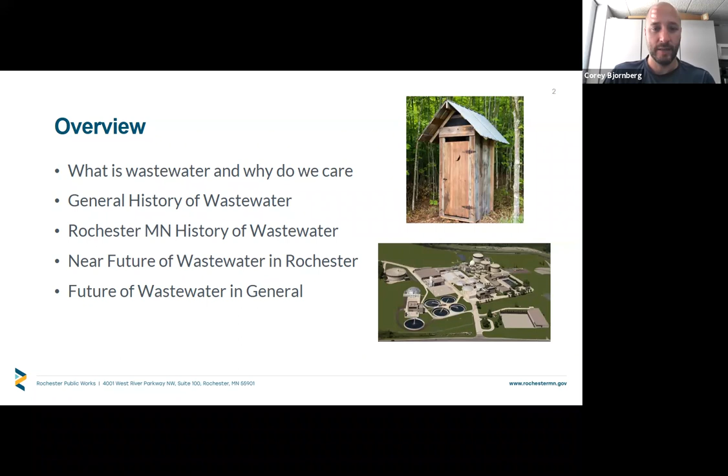And then I'm going to talk a little bit about the future. There's a lot of interesting things going on here in Rochester as well, just with the science in general. I know a lot of people think of wastewater, they think of the famous outhouse up above in this picture. But the reality is you can see the Rochester plant here, picture below, and it's a very advanced facility, as most wastewater plants are now. So there's a lot of science going on, and like I said, it's just a really interesting field.

So what is wastewater and where does it come from? Well, wastewater is water that's been contaminated by us humans. That can include domestic, industrial, commercial. It's amazing. It doesn't take much to pollute water. The water we get coming into the plant is still 99.9% water. We are treating the other 0.1%. Doesn't seem like a lot, but if I showed you a picture of our influent stream, you definitely can tell it's not clean water.

And the way I like to compare it is most cities, most towns, the flow is driven by the amount of people. You can kind of compare that to an interstate. The amount of lanes we need is based on the number of cars we have. However, a lot of places, depending on the city and what industries are in town, the loading, which is the 0.1%, is a lot of times driven by industries.

And going back to my analogy of a road, the thickness of a road is designed for the weight of the heavy vehicles, the semis, the trucks. So we not only have to treat the flow, which is just general population, but the load of pollutants, which can be affected by industries and has been in Rochester.

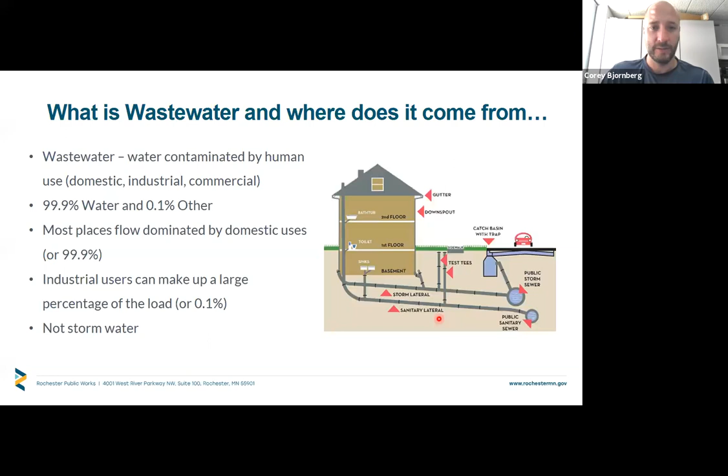the reality is when we get big rains, the flow goes way up. If we have a really high flow, our plant needs to handle that. Essentially you need to build a larger plant if you're going to treat the stormwater, so we like to separate those out. So there are differences. And I always like to plug, if anyone's out there, sump pumps should discharge not to a sanitary sewer. It should go to a storm sewer.

So again, why do we care about wastewater? I think many of us kind of have the mentality out of sight, out of mind. We flush it down the drain and it is gone. We don't have to worry about it. But the reality is that's not the case all over the world. Here's a few pictures from different countries where they don't have the treatment. They simply discharge it out into the community at different points. In 2010, the UN recognized safe and clean drinking water as a human right.

Poor sanitation is linked to diseases, and it's unfortunate this still occurs because with wastewater plants, we can take care of this. Some of the diseases that are common with wastewater transmission are cholera, diarrhea, dysentery, hepatitis, typhoid, and a few others. And 2 billion people still don't have this basic sanitation, and estimates are around 800,000 people die because of inadequate sanitation. And finally, they say, poor sanitation reduces well-being, social and economic development.

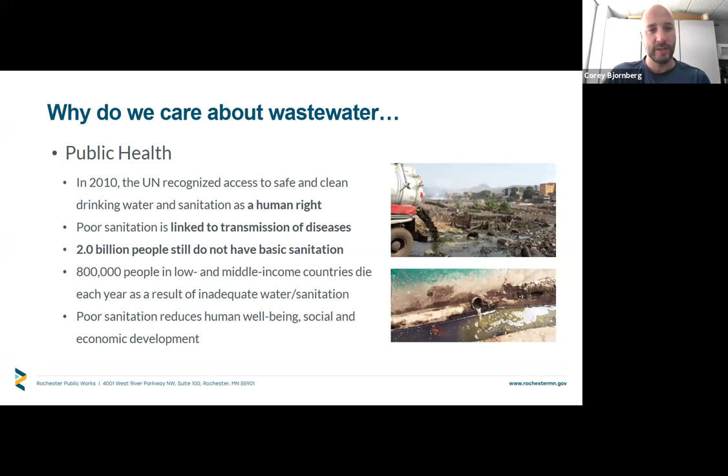And with these pictures, you can easily see that no one wants to be eating at a restaurant if this is going on next door. So the primary driver for wastewater treatment is public health. There are secondary factors, primarily the environment. Discharge of wastewater and pollution from that source can have all kinds of negative impacts on the environment. Organics can deplete the oxygen and result in fish kills. Different materials can wipe out benthic microorganisms, which are the basis of your food chain in your rivers and lakes.

And one of the issues that is still somewhat common today is excess nutrients. They can come from a variety of sources, one is wastewater treatment, but they create algae blooms. I think most of us have probably been to a lake or a river with algae, and no one enjoys being covered in algae. So we also have to consider other beneficial uses: industrial consumption, livestock irrigation, crop irrigation. If we pollute our rivers and lakes to a certain degree, they can no longer be used for those uses. So we always are looking to protect those uses as well.

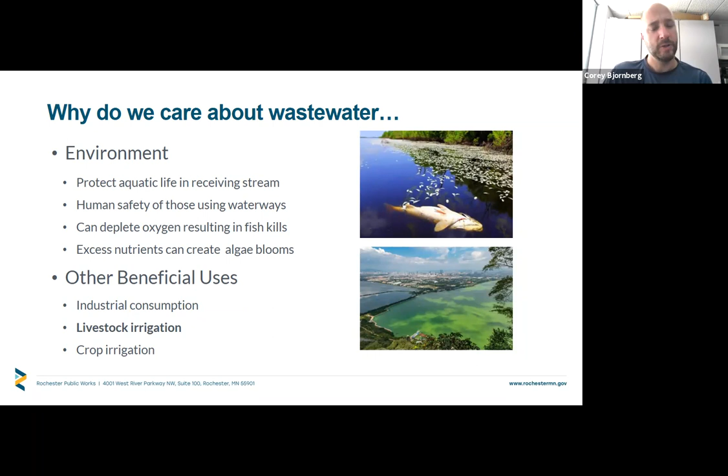I thought this was an interesting quote from Les Mis: "The history of men is reflected in the history of sewers." So an interesting connection to a pretty popular story there.

I'm going to go back and just talk a little more about the long-term history, and you can break it up into 5 main periods. We'll call it early history, the Roman period, the sanitary dark age, the age of sanitary enlightenment, and then the age of stringent environmental standards.

So one of the things as you look back, human waste has always been a point of conflict to a certain degree. How do we deal with it? Who should pay for it? Who gets it? And it's not a new problem. It's a problem that's been going on for a long time, and it's going to be a problem going forward as well. But it is interesting as I go through the Rochester's history, how people's views and opinions about wastewater have changed.

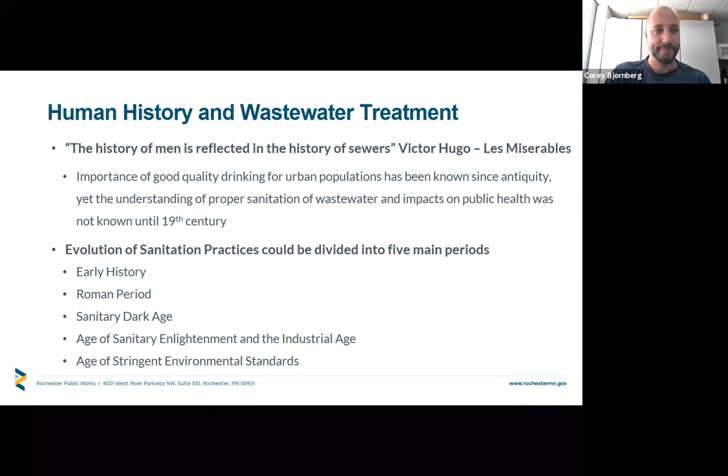So let's talk about early history, 3,500 BC to 800 BC. The hunter-gatherers, it really wasn't too big of an issue because they moved. So when they would relieve themselves, you didn't have too much of a problem because you spread out the waste. It's not till people started really living together and staying in a single location that this really started to become a problem.

Treatment of wastewater was really a recent development. For the longest time, people didn't understand exactly why, but they knew that wastewater caused issues in terms of health. Obviously, we just have a natural ability to look at water, and no one wants to drink water that doesn't look clean. So there's some natural abilities that we have, and people quickly realized that if we're going to live together, we need to move this out of our living space.

So the Mesopotamian Empire, they were one of the first. Their ruins show that homes were connected to a drainage system, and the latrines would lead to a cesspit. This was only really for certain homes. It seemed like the more wealthy homes had this, while a lot of poor people really just threw their excrement onto the streets, which would be tracked around and carry diseases.

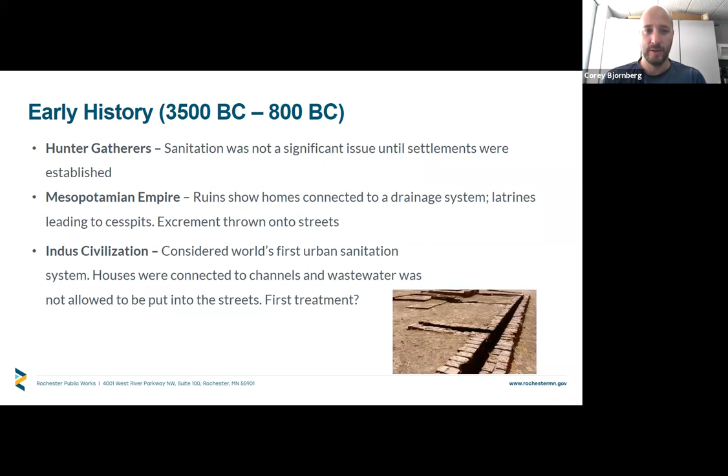The Indus civilization, they were the world's first urban sanitation system. They were one of the few that actually did a little bit of treatment. Essentially, they had terracotta pipes, and it would gravity flow into a small pit and let the solids settle out, and the overflow would go back out into a channel. So it's a pretty crude treatment, but pretty impressive for the time that they actually were removing some solids versus just conveying the wastewater.

It was interesting. I thought that they would be buried, or at least some folks would be buried with their toilet seat. I'm assuming that the kids maybe didn't want their parents' toilet seat passed down through the generations.

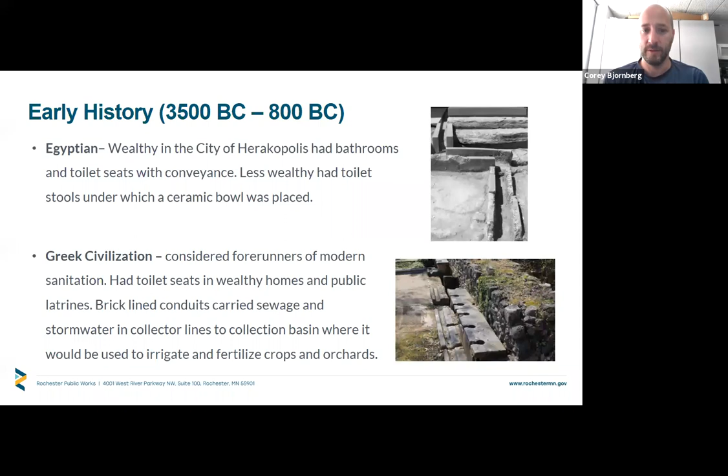So the Greeks were kind of the modern forerunners of sanitation. Again, the wealthy had toilet seats in their homes. A lot of times they were made of limestone, but they also were the first to do public latrines. You can see an image here of what they would have looked like. And again, they would essentially have some rough half pipe, and it would flow down and away from your populated areas. The Greeks also did build cesspits and were actually using the waste to irrigate and fertilize crops. So they were one of the first to reuse some of the waste for different purposes.

And then the Romans, they reached a different level of engineering. Everyone kind of knows about the spas and their aqueducts, which were bringing water in. But what people don't know is the extensive networks of sewers that they also put in. And they also were aware of different water quality. So they knew that the spring water was better for drinking, and surface water from a river or a lake was better for using in the spas or flushing latrines. They also recycled their water. So the water from the spas would actually be used in the latrine. So they really reached another threshold compared to anyone else.

One of the interesting things about them was almost every major city put in an extensive sewer system and stormwater system. The rich had their own bath houses, but the poor had public spaces. But one of the things the Romans discovered was, again, in the early years, if they didn't convey wastewater for even the lowest class, it resulted in epidemics breaking out. So Rome made sure that even their lowest, poorest citizens had access to sanitation in this manner.

So they also built some incredible structures for this. The Cloaca Maxima was essentially a sewer out of Rome. Originally, it was used to drain a marsh that they wanted to build on, but later it was converted to a sanitary sewer, and it went out to the river Tiber, where it was discharged. So again, not treatment, but conveyance, getting it away from the citizens, getting it away from the populated area.

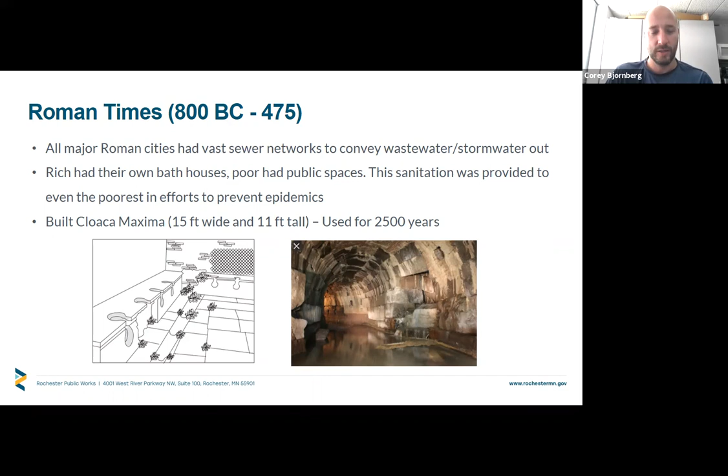And they viewed it as, again, just keeping your population healthy also made it productive. The Cloaca Maxima is actually still in existence today, and I believe parts of it are still used for sewage conveyance. After the fall of Rome, things really took a step back.

These are some different images from the mid-centuries there, and it was pretty common simply to discharge your waste out into the streets or relieve yourself in buildings. So you can see a few of the images there. And if you had a castle, you kind of built a vertical pipe for it to fall down. Some places did have a few sewers and there were some cesspits, but ultimately this led to, again, a lot of epidemics, a lot of health issues.

And actually it became so polluted at times in different countries that water was considered unhealthy, resulting in a lack of hygiene. When I was getting ready for this presentation, I learned that the wigs that were used in certain countries were to cover up the dirty hair because they didn't want to use the water. They knew, again, humans always kind of have this innate knowing not to drink contaminated water. But it's interesting, some of the social changes, because they were so fearful of the unhealthy water.

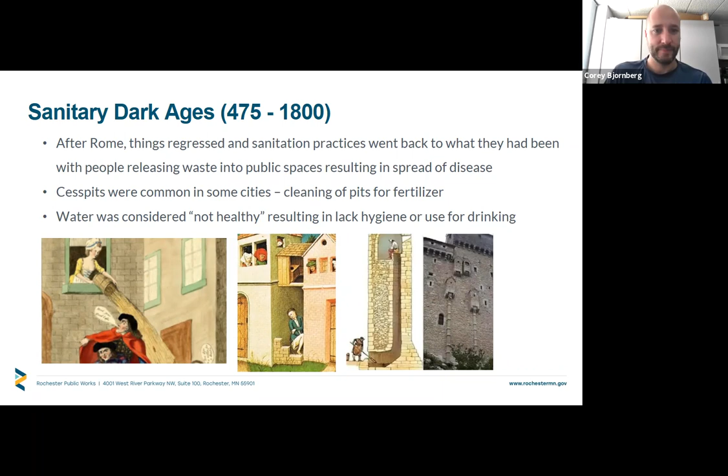So then we get to the Industrial Revolution, and this is really when things start to turn. So essentially, the high increase in population and density caused the need for sanitation. Again, at this point, people kind of knew that they needed to convey the wastewater. They needed to get it away from the people. And generally that meant discharging it to your nearest river.

So in Britain, they built a very large sewer and discharged to the Thames River, but it became overpolluted very quickly and resulted in what they called the Great Stench. So the river must have been just terrible. But by the late 1800s, people started to look at, okay, we can't simply dilute this in the rivers. There's too many people. It's causing issues. We have to do something about it. So they started working on different technology.

One of the things I mentioned here is BOD, which is biochemical oxygen demand. A test we still use today, but one of the first tests to measure how polluted wastewater is. Essentially, it's a measure of organics and how much oxygen it takes to degrade those organics. And so they could start measuring how polluted things were. World Wars, both 1 and 2, really slowed the progress down. At that point, wastewater treatment technology kind of just really stopped.

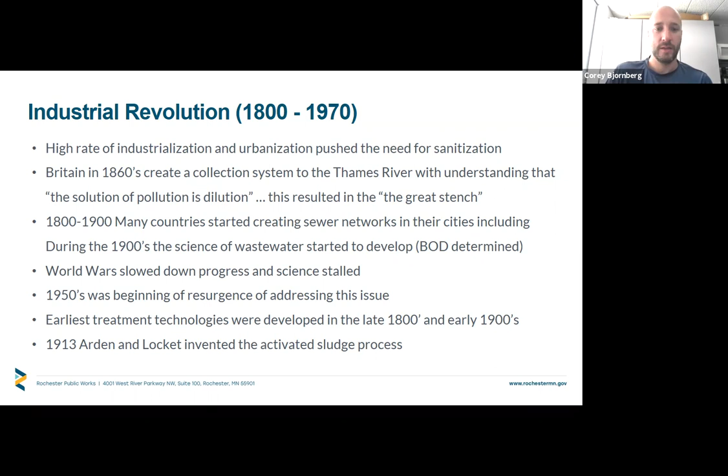And then finally, the stringent environmental standard period, which really just started in 1972 with the Clean Water Act. So, we're only talking 50 years of really stringent effluent standards. A lot of growth in the science fields really helped progress this, understanding both rivers, lakes, but also how to treat plants.

This picture here, essentially, we have an Imhoff tank. It's an older technology, but it is still used. But here's the one I want to point out. This is an activated sludge process, the basic concept. Essentially, your wastewater is going to come in. It's going to go into this aeration tank. We're going to add oxygen or air into this tank.

And then we're going to use microorganisms, or I'm going to just refer to them as bugs. And these bugs are not anything special. If you dug in your soil in your backyard, you'd find a similar set of microorganisms. But under that environment, they are going to degrade and reduce pollutants. Once they've reduced the pollutants, they actually come to a settling tank. The nice thing about these bugs is they settle, they sink. So they settle to the bottom and our clean effluent comes off the top.

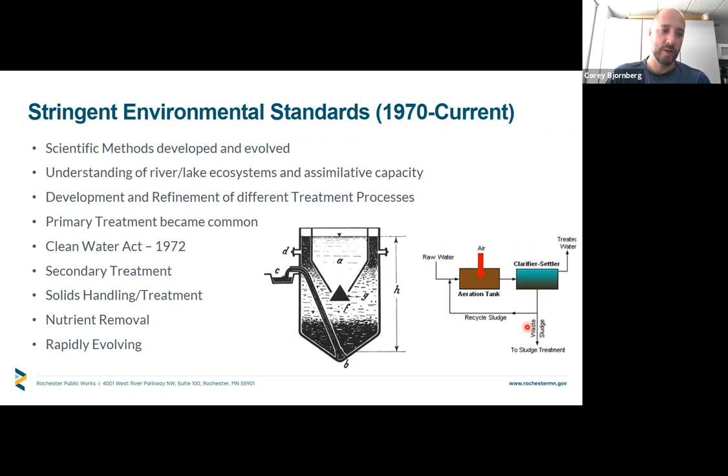And then what we actually do is recycle them back around to go again. So they just constantly go in a loop here. We do have to waste a certain percentage of them. They would overtake our tanks eventually. So there's a wastage portion to this. And we'll talk a little bit about what that means because we have to do something with that waste as well.

So that's a very brief history of wastewater in general, but now we'll talk about the Rochester plant specifically. So as with most places up until kind of the late 1800s, early 1900s, again, we're conveying our wastewater. Let's get it away from people, which meant we're either discharging into a river, a lake, or in some cases an open field.

What happened in Rochester specifically was in 1916, farmers of Cascade Township began to complain about the river conditions. The river was polluted with the wastewater. Their cows, chickens, pigs were dying from drinking the water. They even threatened a lawsuit to the city for being robbed of the natural use of the river. You know, 1916, this is a couple of years after the invention of activated sludge, just keep that in mind.

In 1924, the city created a charter that allowed for a sewer plant. One of the things that I'll talk about is the names of wastewater treatment plants have changed over the years. It was pretty common initially to be sewer plants. Now there's varying names. We're currently the water reclamation plant. We're reclaiming water to release to the environment.

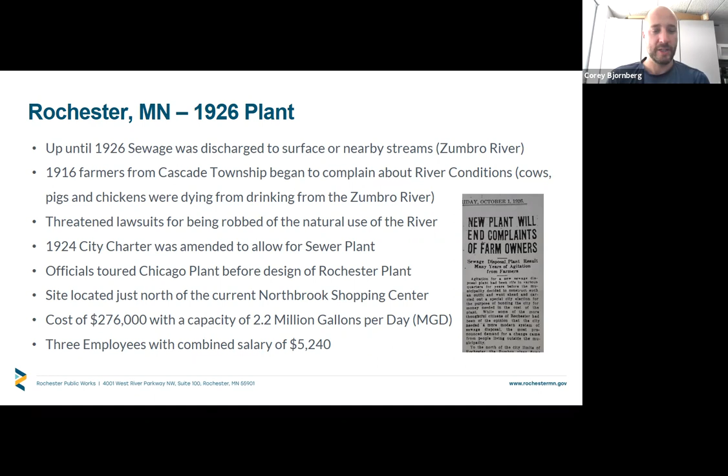Prior to building that, again, this was a very new science. A lot was not known. So officials from Rochester toured the Chicago plant before designing the Rochester plant. And the site is actually on a different site than we're currently located. It's located just north of the current Northbrook Shopping Center. It cost about $276,000 and had a capacity of 2.2 million gallons per day, which is a pretty big plant at that time. They had 3 employees with a combined salary of just over $5,000.

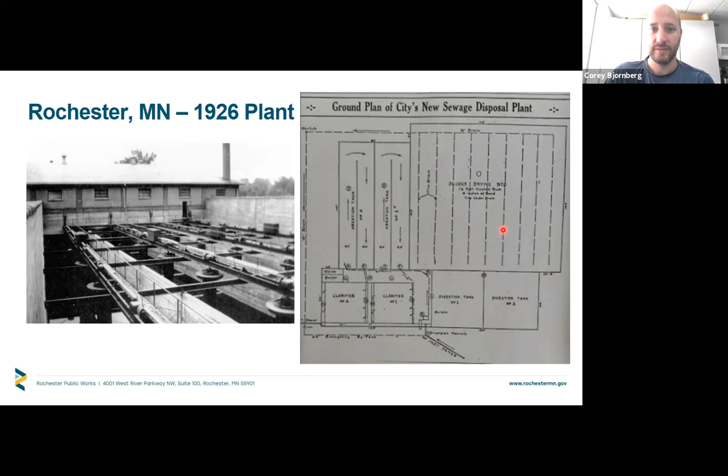So, one of the things you're going to hear me say over and over again is rapid growth. Rochester has grown relatively fast compared to most Minnesota cities. And because of that, the plant was overloaded fairly quickly. Industries also played a part in that. I'll talk a little bit more about that.

But essentially by the late 1930s, that plant was overloaded. It was designed for 2.2 MGD, but by that time they were handling about 2.8. So it was already over capacity. They were planning on expanding in the late 30s, but then World War II struck. And so it dropped off. And it wasn't until the 1950s that the discussion picked up again.

So from the 1930s to about the 1950s, that plant was simply overloaded, which means it did some treatment, but not treatment to the degree that we would want. By the 1950s, again, because it was overloaded and the fact that they used some of the drying bed technology, they decided to move the plant. They moved it 2 miles out of town to our current location right off 37th Street. And that was largely driven by the odors and complaints around the odors.

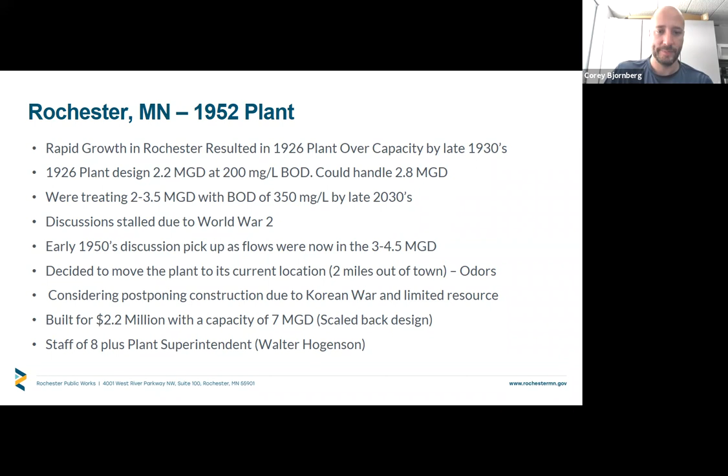They built it for just over 2 million with a capacity of 7 million gallons per day. But again, it was scaled back from that initial design. It was staffed by eight employees. This is what the plant looked like. If you drove by today, you can still see where the water tower was located, and this building still exists. And actually, most of these buildings still exist out here, and some are still used to this day.

The primary technology, I've talked about activated sludge, where we create a mixture of microorganisms in a free floating suspension, and we aerate them. This used a trickling filter design. Essentially, these tanks are filled with rocks, and you sprinkle the wastewater over the rocks, and you get the same sort of microorganisms that grow on the rocks, and they do the treatment. So you don't have to provide energy in terms of mechanical means to get air, because the air is there as it trickles down through these rocks.

You can see in the original design, it was going to be a 2-stage process. They only built 1 stage, and the performance was a little less than they expected, but they also eliminated the 2nd stage, which dropped performance. They also were planning on 4 digesters, and when I say digesters, anaerobic digestion is a popular treatment technology. The bugs were wasted from these different processes. Originally, they just put them on drying beds. We learned that we need to digest them.

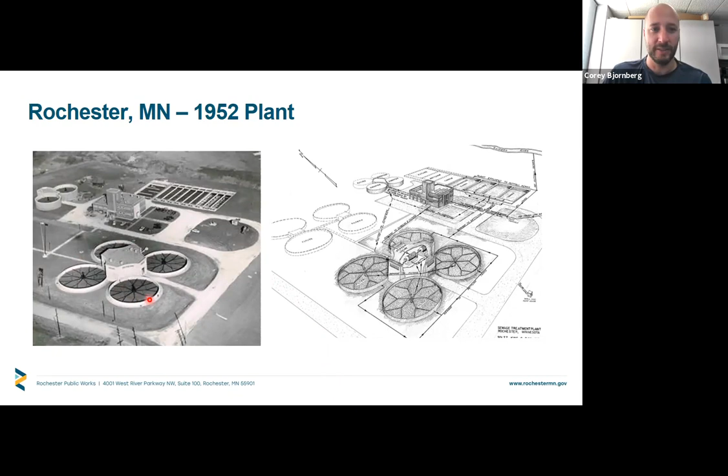So I should say the trickling filters we moved on from, but we kept some of the rock on site. So if you ever do a site visit, I can show you. We do still have the rock. We used it to stabilize some of our hills out here. So we reused that rock from the 52 plant.

A few pictures here of that plant. So here's the trickling filter. You can see the arms coming out. That is where the wastewater would spray out and then over the rocks. This is the main admin building at that time.

One of the things, usually civil engineers were the designers for wastewater treatment plants. Initially, they were really good at designing buildings. So when you see older treatment plants, they usually have these older, beautiful buildings because that's what they knew how to design and how to design well. And then when it came to the processes, not so much. It was still much of a learning curve.

So they did have a vacuum filtration system. So one of the things we do is when we generate these solids in the form of these different microorganisms, they're usually mixed in with liquid. We try and dewater them. It's simply a way to reduce the volume, which reduces conveyance cost of disposal. So think of it as hauling one bucket out to the dump versus 10 buckets. It just makes it more efficient. So they used a vacuum filter technology, which was really innovative at the time. But I don't think it worked all that well.

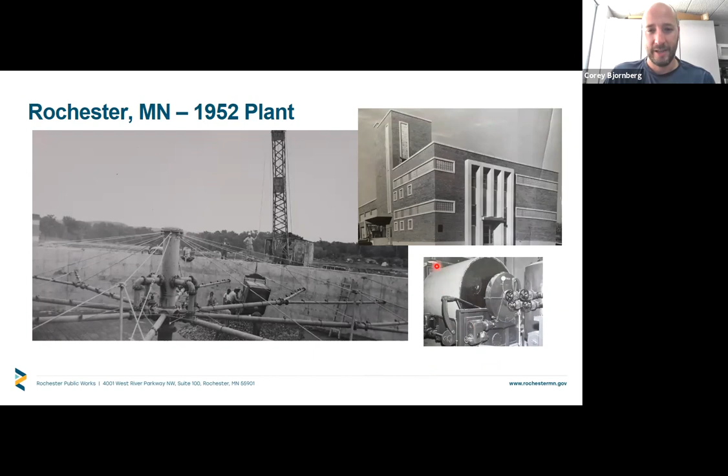So again, continued rapid growth in Rochester, and the industries. Rochester historically has had several dairies. Nowadays we have pre-treatment requirements. They have to reduce a certain amount of their loading. At this time they didn't, so they would just discharge everything. So there could be huge, massive amounts of dairy waste that would come to the plant, and it quickly overloaded the plant, especially on the solids handling side, which means the digesters that I talked about were digesting the waste bugs.

So again, one of the trends you'll see in Rochester's history and in a lot of places is the original plans were scaled back due to cost, and then they find out that they essentially had to do those additions later on. So in the 52 plant, they decided not to build two of the digesters, well, 6 years later, they ended up building those digesters and even building them larger than they originally had planned. And those were about 270,000. And here you can see a picture of what's inside an anaerobic digester.

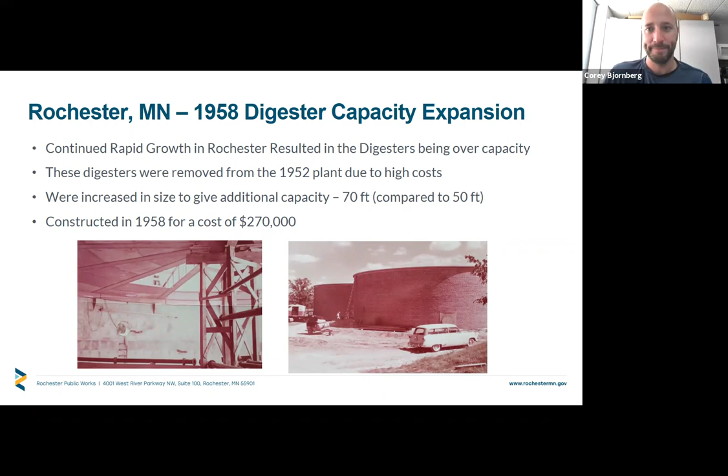So now we got to the 69 plant. Again, primary driver for this was rapid growth. They picked a different technology here, and I couldn't find in my records exactly why. They actually went back to kind of an activated sludge in combination with a trickling filter. I'm not sure if it was for cost, or more likely it was due to odors. Trickling filters can be odorous, and there are reports that the odors from the plant were an issue. So it might have been that reason, but I don't really have a firm answer on that.

One of the big issues with this plant was while they were building it, and this is a problem we still face, while you're doing an upgrade and expanding a plant, you still have to maintain treatment. We can't tell everyone, hey, for the next 2 years, you can't use your drains. And so one of the upgrades was going to be to the raw pumps. Well, what they planned to do while they upgraded the raw pumps was simply discharge wastewater into the river untreated for about three weeks. And the public got wind of this, and there was a big uproar.

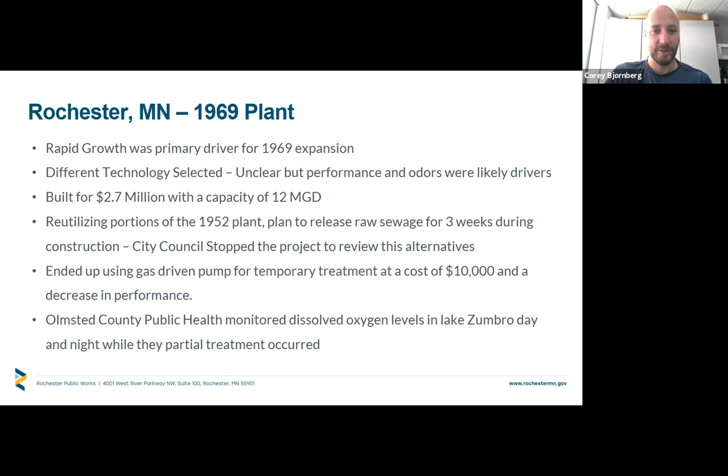Essentially, this is the plant. The modifications: they changed the pump station. They built the activated sludge plant again. So we're now back to the technology of the '26 plant. But they did add primary clarifiers.

So a primary clarifier is essentially a big tank. Think of it as a small lake, and you settle out your solids and you pump them to your digester. Why you do this is it essentially reduces the load on the bugs that need to be aerated. So it's an efficiency thing. You can reduce your aeration requirements, which can save you money.

So essentially the flow came in, went through some primary clarifiers here, then the activated sludge plant, and then final clarifiers. And then I should say intermediate clarifiers, because then it would actually go to the trickling filter. So you had a 2-stage system, one level of treatment here, one level of treatment here, and then you go to your final clarifiers, chlorinated and out.

They did have a sludge lagoon at this point. One of the things with the sludge, or the waste bugs that have been treated safely, no one really knew what to do with it for a long time. So one of the options was to build lagoons and simply store it there. They also put in drying beds again. Again, I think like the '26 plant, we went back both to an activated sludge and drying beds. Guess what? It created odors again. So we got more odor complaints.

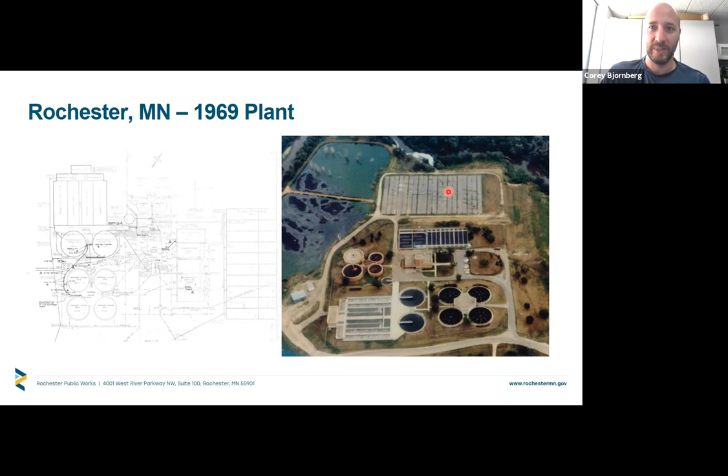Some pictures of this plant. Just kind of go through these quick. This is at night. One of the questions Abby asked early on, is it manned 24/7? The answer is almost always yes for Rochester. It depends on the technology for other cities.

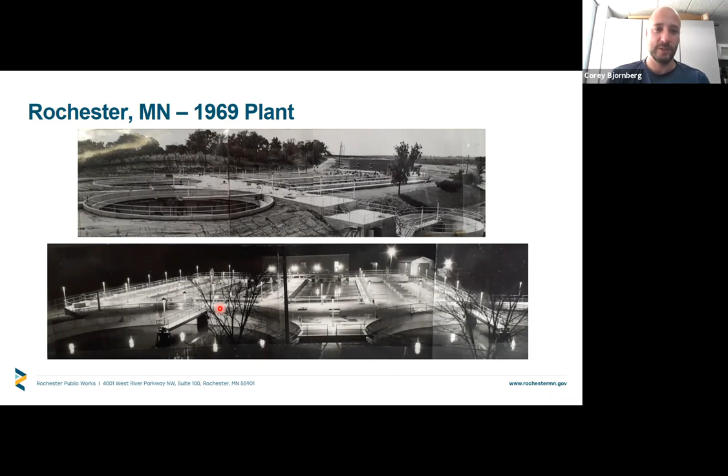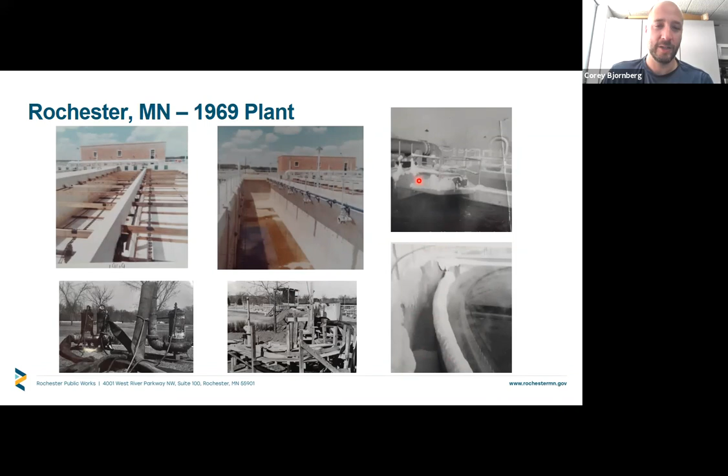Just some more pictures. These are the clarifiers. This was the activated sludge tank. This was the temporary pumping they did so that they didn't have to release raw wastewater into the river. One of the things they found, obviously we live in Minnesota, snow and ice becomes an issue. You get lots of buildup of frost, which can create havoc on your system.

All right, so now the 1980 plant. So essentially 1 year after the '69 plant, the Pollution Control Agency approached Rochester about tighter limits. So generally speaking, we've talked about expansion because of increased loadings and rapid growth within Rochester. Now this upgrade was really driven, at least in part, by tighter limits. So they were pushing for some pretty stringent limits.

And one of the interesting things at this point, before they built the '80 plant, they gave a strong consideration,

sorry about that, the intercom is going off.

But they gave a strong consideration for actually moving the plant, moving it to near Oronoco or in Oronoco Township. They also considered a sewer district. They considered combining with Dodge Center, Kasson, Mantorville, Byron, Pine Island, Oronoco.

Should stop here shortly, sorry about that. But ultimately, the increased costs for moving the plant and... there we go. Again, I apologize for that.

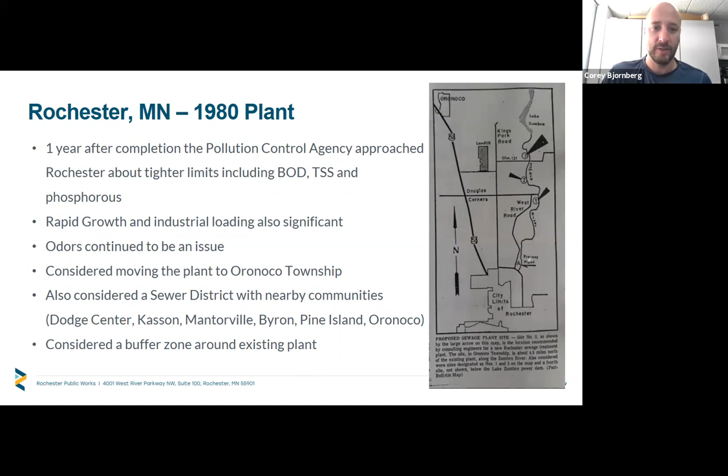Then, as they were working on this plant, we had the '78 flood. Most folks who have lived in Rochester are aware of this flood. It did submerge a portion of the Rochester plant, and treatment had essentially stopped for a period of time because a lot of it, especially the raw pump station, became flooded.

So during this time, to get around the plant, one of the operators brought in a boat, his own personal boat, and that's literally how they got around to the different processes to try and get the plant up and going. They even had an interview on a boat for a new operator at that time.

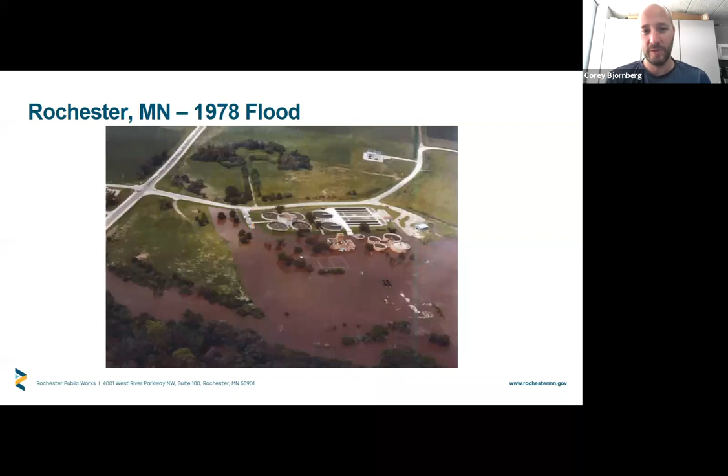So then we get to the 1980 plant. Again, this was largely for lower limits, but it just so happened that there was a bunch of federal money available at this time, especially if you were choosing innovative technologies. So we used an HPO design, which is high purity oxygen. Essentially, that means that instead of normal air and feeding the bugs, we're feeding them high purity oxygen. It's the same thing if you go to a hospital, they give you high purity oxygen to help you breathe better. It's a more efficient process, one that we're still using today.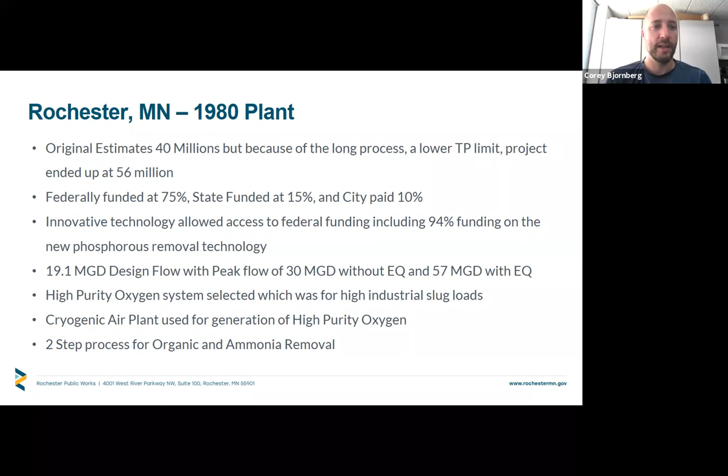The city only paid 10% of the project cost, and the total cost was around 56 million for this project. So the city only paid 10% of that. And the capacity was increased to about 19 MGD.

And I'm actually going to let Wendy here, Wendy Turry, who's the Public Works Director, talk. She worked at the plant about this time and actually worked on this process. So I'll let her talk a little bit about it.

Hey everybody, thanks for having us here. It's fun to talk about wastewater. I came out of college in '82 with a chemistry degree and was going to be a mad scientist, and ended up getting offered a job here, and I've been working in wastewater for 39 years. So I got the bug.

So a couple things that you'll see: odors drove the design of this plant, and innovation, partially because the plant superintendent at the time really liked to be creative and look ahead, and also the funding. You could get really good funding, and we had to treat for phosphorus. Not many people had to treat for phosphorus, and nobody in the state was using this kind of treatment, and this was really using bugs to treat for phosphorus. Instead, they were using chemicals, and chemicals were expensive, and you had to bring them in. If you can use bugs, it's much cheaper and better for the environment.

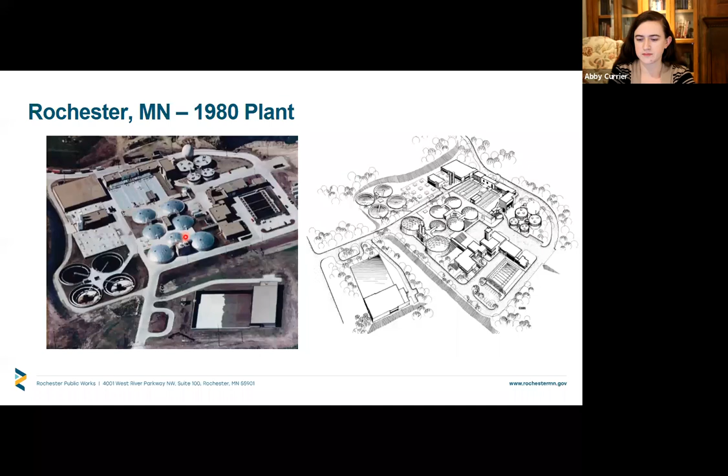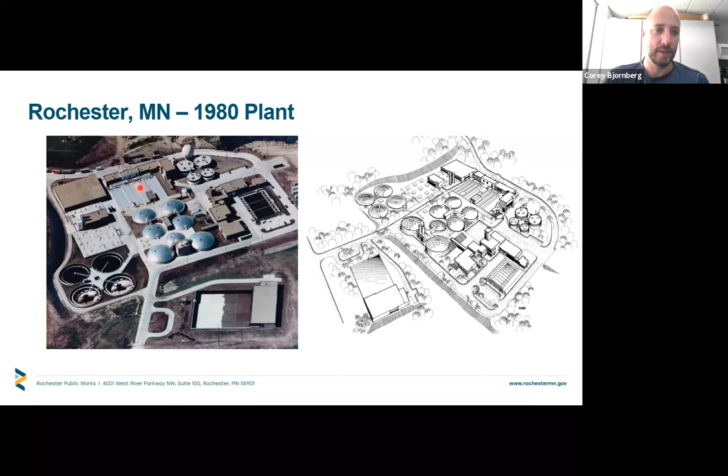So Wendy talked a little bit about the Phostrip process, which were these tanks here. But essentially, this was the new plant here: these tankage here, and this tank here. And this plant, which was the 69 plant, was actually abandoned at that point. Later it was retrofitted for some other uses, but at that point, they really moved on to this technology here. So a few pictures of construction. You can see it was quite a big project to build that.

I'm going to talk a little bit about a cryogenic air plant. That's how we make high purity oxygen. If you're familiar with Highway 52 and the oil refinery, just north of the oil refinery on 52, they also have a cryogenic air plant. So it's this tall structure. Essentially, it's a distillation column. I'll talk a little bit more about that in a second.

These were the raw pumps. So now we're starting to get into some serious size. All these pumps could pump about 50 million gallons per day. You always size your plants to make sure that you can pump all the wastewater. I say, our number one job is to treat wastewater, but our number one job is to pump wastewater, because we don't want to back up into people's homes and expose them to raw sewage.

Also, it's kind of hard to see in this picture, but this is our sphere. One of the things with anaerobic digestion, where we talked about digesting the bugs to make them safer, that process actually releases methane. And one of the innovative things about this plant was we decided that we will collect that methane. We can store it in this spherical structure, which we still use today. And then we can feed it into boilers or generators to either produce our own heat or our own electricity. So that's something we still do today.

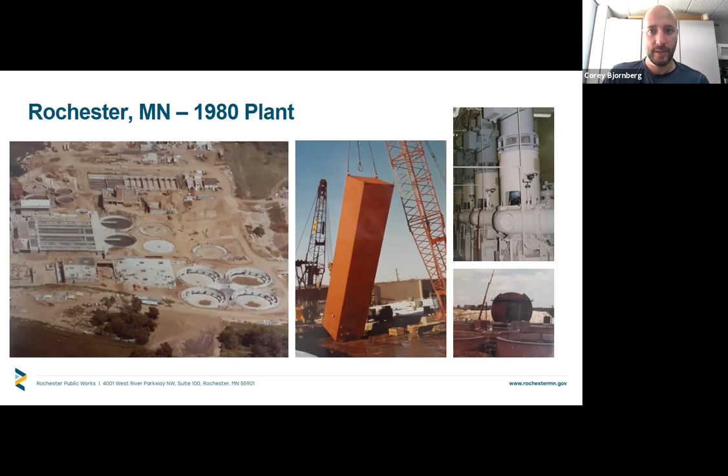Some more pictures of the construction here. One of the things that the 80s plant also did was start bringing in automation. Up to this point, most of the changes that would happen in a plant involved an operator walking to a valve or a piece of equipment and doing something. Here, they actually started automating it, which Rochester, again, was one of the first plants in the Midwest to do. It took a lot of work to automate it. It worked okay. It's come a long ways, I think. Nowadays, it only takes one person to operate the plant, and most of what they're doing is sitting at a computer like this, monitoring all the different processes. A lot of it is simply automated.

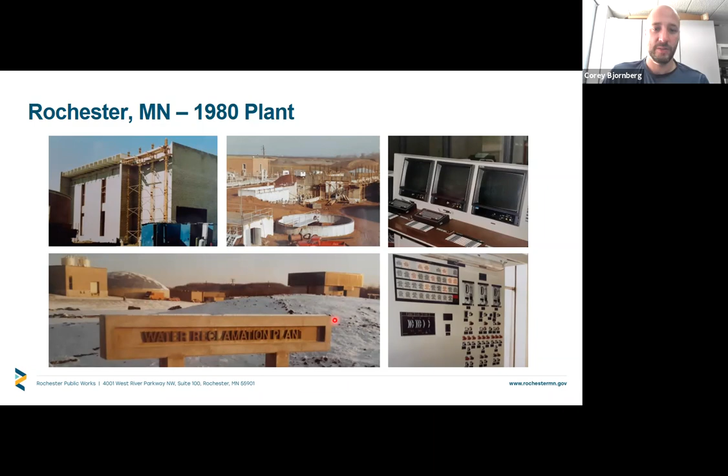We're going to cool it to minus 280 degrees, at which point oxygen is going to liquefy. Our nitrogen is going to purge off, so we can purge off the nitrogen. We then heat up our oxygen again, vaporize it, and then bring it into our bugs.

I can tell you it's a complicated process. It is by far and above the most stressful process for our operators. When something goes wrong, you have about an hour to fix it. If you don't, you have to do an emergency shutdown. And then at that point, we have to bring in consultants, and it takes about a week to restart the system. So it's a very complicated process.

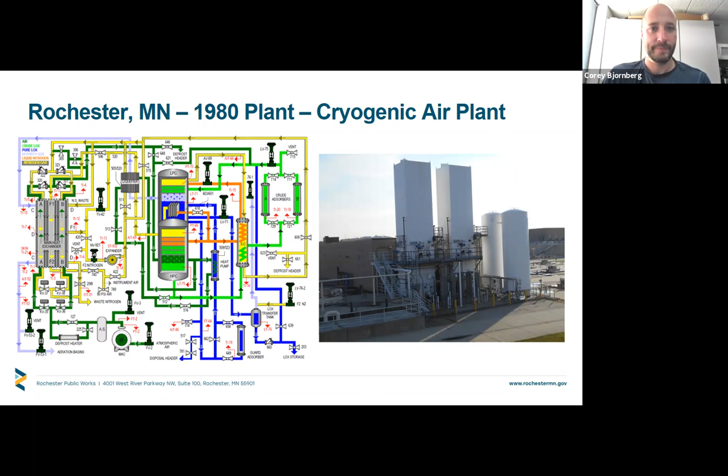So shortly after the 1980 plant was put online, we had significant industrial growth, including Libby's, which then became Seneca. And so shortly after we built the plant, we were already at our limits. Also, Wendy talked about the Phostrip process, and ultimately that was considered a failed technology, which is interesting because actually the essence of that process minus the lime addition is used today at our plant in the next upgrade. So ultimately, they couldn't get it to work back then, but eventually, as the technology advanced, we figured it out.

A big part of the 80s project was odor control after the fact. We really started focusing on odor control because, as Wendy mentioned, the lime process really made it odorous. So we started putting in odor scrubbers and covering a lot of our tanks, because we want to be good neighbors, and we still want to be good neighbors, and so it can be a challenge to get those odors under control.

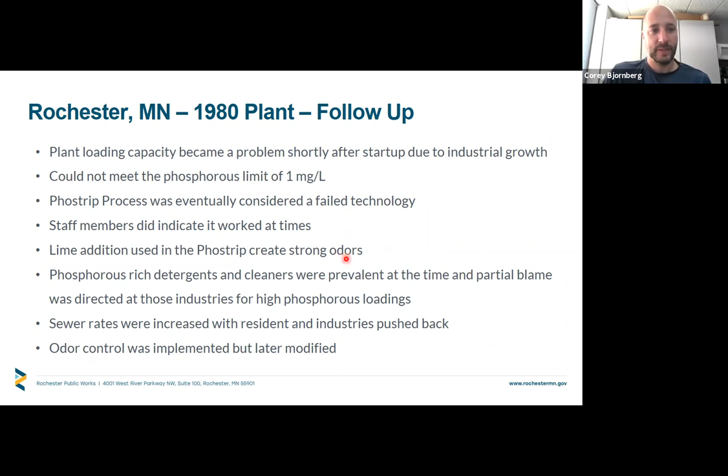So ultimately, with the Phostrip failure, our next addition was actually a chemical building addition. So instead of using biological means to remove phosphorus, we use a metal salt, ferric chloride, and that does a really good job of removing phosphorus. It was built in 1989 because that Phostrip process actually failed.

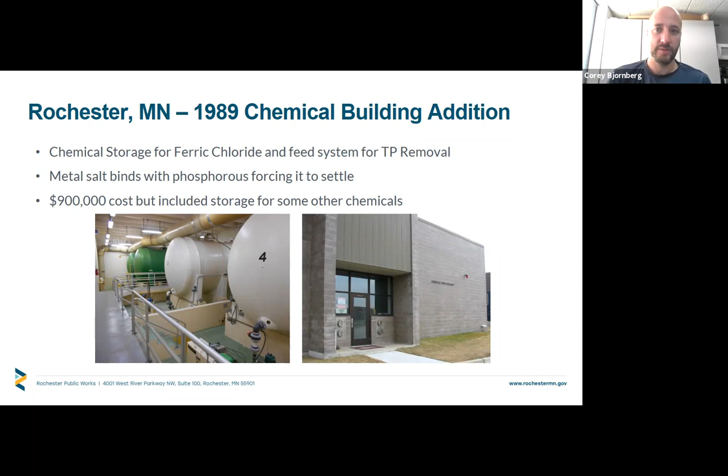And because of the high loading and the industries and the fact the plant became overloaded almost immediately, they actually expanded digesters again. And you're seeing a trend, I'm sure, here with the fact that a lot of these processes are the same. The activated sludge in the 26 plant and anaerobic digestion, which was put in the 52 plant, we still use today. We've optimized them, but essentially the tanks are just bigger as we treat more and more wastewater.

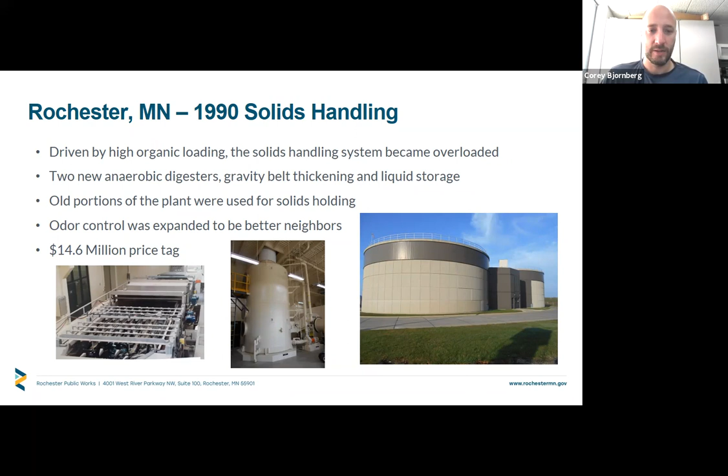And when we built the 80s plant, one of the primary drivers to move it out of town was because of odors. They decided not to. Now our plant is entirely surrounded by the community. So we always focus on making sure that we control our odors.

So the 80s plant, even though it was overloaded, did last until about the early 2000s in terms of capacity. However, in the early 2000s, as Rochester continued to grow, we again were overloaded. It was ultimately decided to expand the plant.

One of the things that engineers have realized over time is to make sure that you leave room to expand the plant. Essentially because of the configuration of the HPO plant and the 80s plant, there wasn't room to expand the HPO plant, so they actually built a second plant.

It has a 5 MGD capacity, so we do have 2 plants on site. We talked about the failed Phostrip. Well, I actually ended up doing a modification to that system where we do biological phosphorus removal. This means we're using microorganisms, and you can stress them in a certain way and they will actually take up phosphorus. So they can actually do a better job than we can do with chemicals. So that technology is used in our smaller plant. It can get down to like a 0.3, 0.4 phosphorus, where our chemical feed is usually in the 0.8 range.

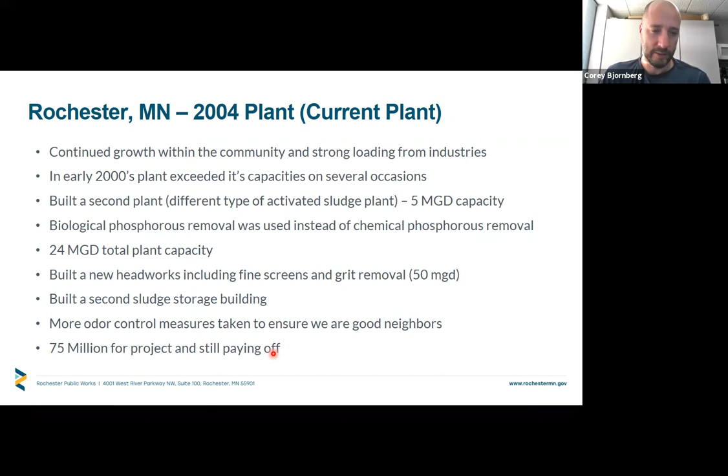So here are some different pictures of the ABC plant, or the new plant. This is a primary clarifier. We're just settling out the solids. It's covered for odor control. This is the aeration basin. It is covered for odor control. And then the final here is exposed, and you can see this when you drive by 37th Street.

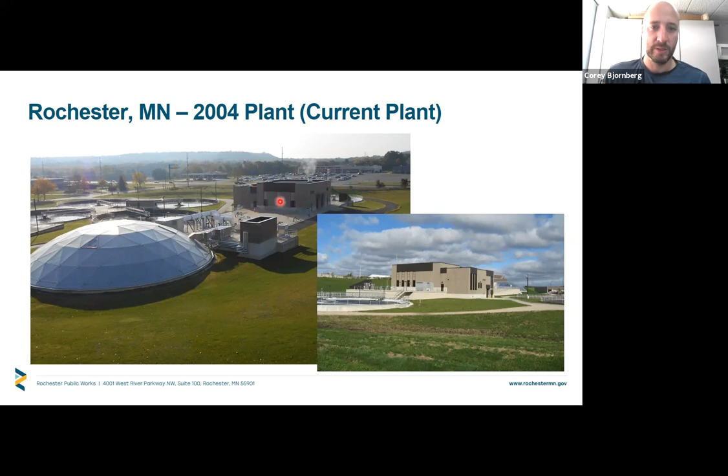So the treated water is coming off the top, and the bugs are settling in the bottom and getting circulated back. It's pretty rare to cover aeration basins like this, but again, because of the history of odor issues, they decided to cover these basins. And then this building on top is actually where we house the blowers. So this is how we get oxygen in with the bugs.

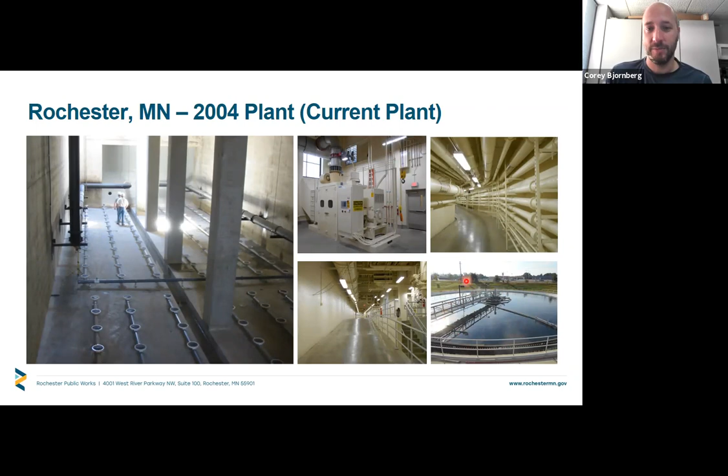In case you're curious, the color is buff. We paint everything the same color. That's just because it's easier to buy one paint color throughout the plant. This is a final clarifier for that. So again, this is one of the few places in our process that you can actually see the process or the treated water.

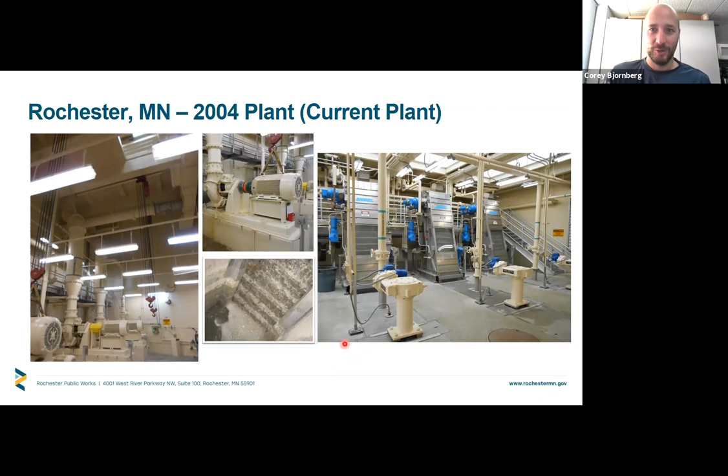So I'll just use this time to, when I give tours to kids, I tell them the 3 Ps. There should only be 3 things that go down the toilet: pee, poop, and toilet paper. And the kids can usually remember that. So I'll just pass that along here too.

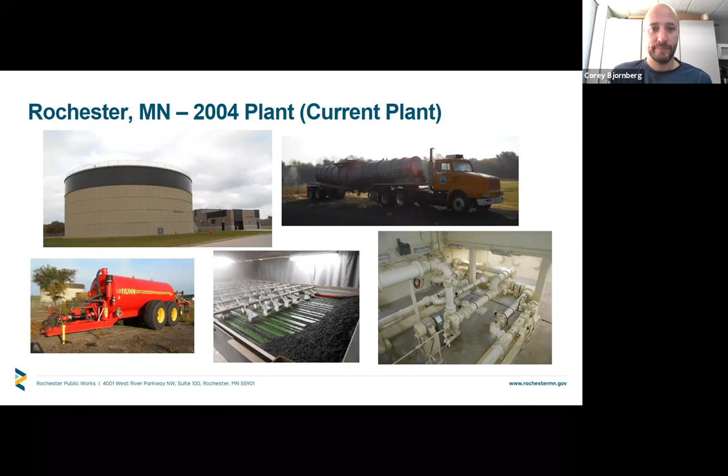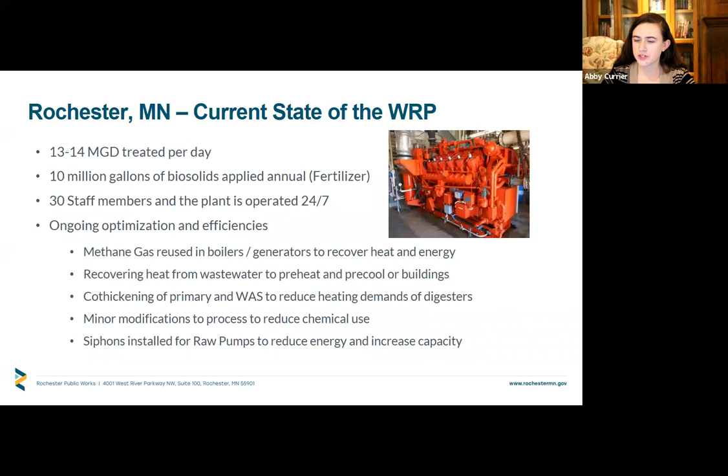Corey, can we start transitioning into the question and answer portion? Yeah, yeah. I see them coming in. Sure. Why don't we stop here then? Great. All right. Pull these up.

Okay. So the first question is in regards to the bugs, the microorganisms you've been talking about. Who or how were the bugs discovered as useful in this process? Like, who came up with that? Yeah, so that goes back to 1913. That's when they discovered the activated sludge process. And again, the bugs themselves are nothing special. If you took some soil from your backyard and looked at it under a microscope, you would find a lot of the same or similar microorganisms.

Essentially what we do at a wastewater plant when we're using these bugs is what nature does naturally. We're just speeding it up and concentrating it into one spot. So yeah, in 1913, I forget his first name, but it was Lockett that discovered that process. And where do you guys get the bugs? I'm just curious. Obviously you can't order them off Amazon.

Like dig out back or? So theoretically, if you started up a new plant, a lot of times we'll seed it from another plant. But the reality is eventually, if you just started putting wastewater in, they would grow on their own. They're just so abundant that it would take off. But that would be a really slow process.

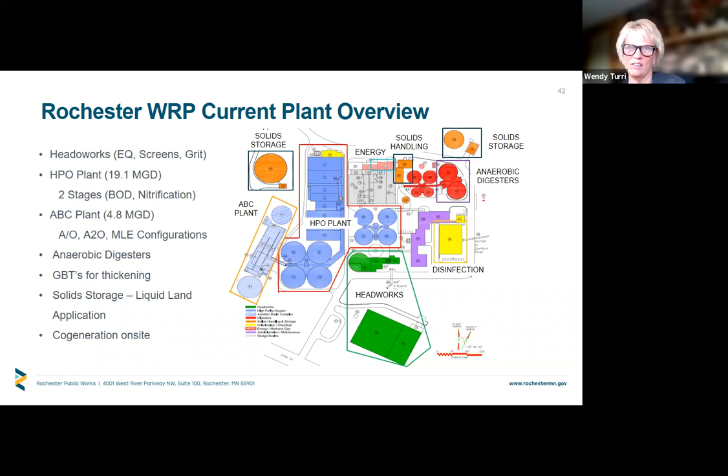Back in the 1980s, before we had phosphorus treatment, that caused more eutrophication, and once it got to Lake Zumbro, it kind of sits in this pool and builds. One of the requirements was to get out there and sample, and it did cause a lot of blue-green algae. There were parts of that lake that were completely covered with blue-green algae in the early 80s.